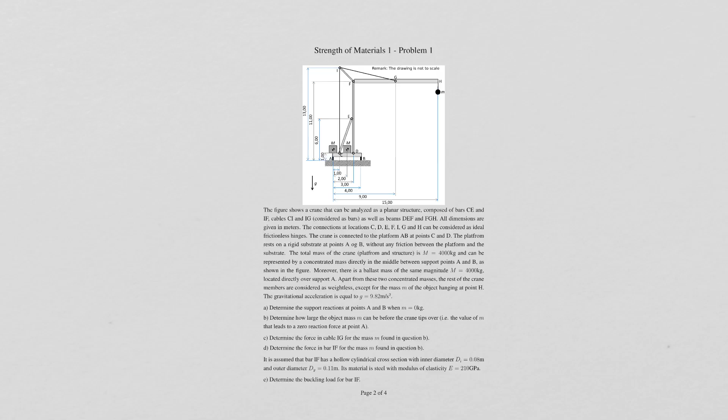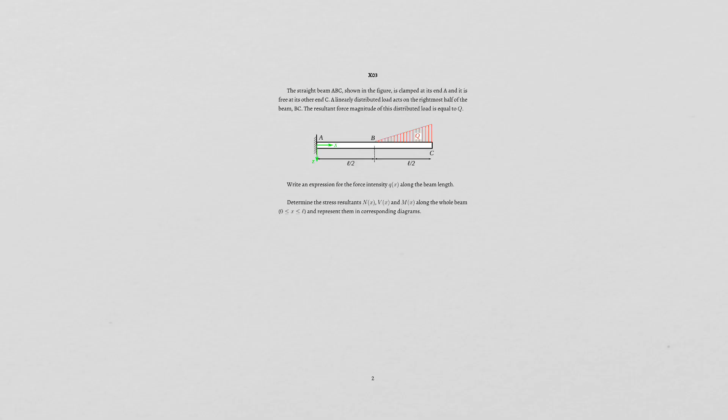So the first one is a pure statics exercise. There are 5 questions in this one, so we will go through all of them. The second problem is about a distributed load and about drawing stress resultants. And the final problem is about composites. So that covers pretty well a lot of the syllabus that we have been going through in the course.

In the first question, we are asked to determine the support reactions at point A and B when the mass small m is equal to 0. So we see here a drawing of the problem. Small m in the first part is equal to 0, but we have 2 other loads: we have capital M here and we have capital M here. So we have 2 external loads on the system, and we're asked to determine the support reactions at the 2 points of the support, here and here.

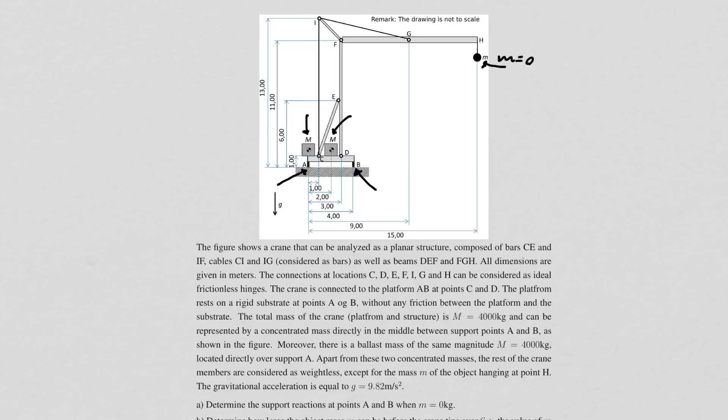So of course, when we're asked about support reactions in a statics exercise, we need to do a free body diagram of the complete structure. So let's move to it. Support reactions in A and B—we will draw a free body diagram.

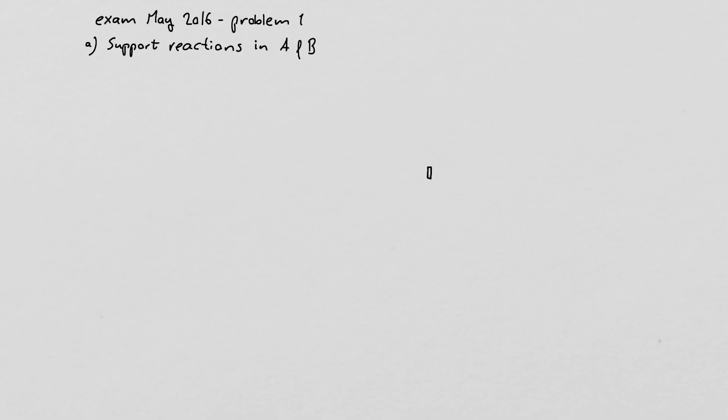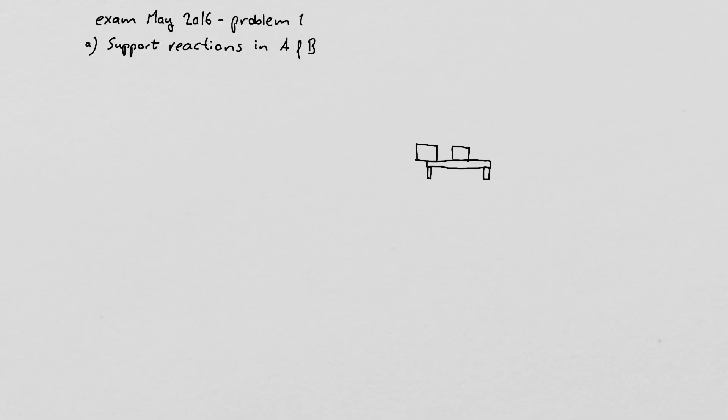So we have one external mass here, another external mass in the middle here, and then we have some structure, of course. I'm just going to be slightly sloppy in drawing this one. Why am I going to allow myself to be slightly sloppy with the rest of the structure? Because when we're drawing a free body diagram of the entire structure, we need only external loads. So what do we have of external loads? Of course, we have the support reactions in A and B, which we are asked to compute.

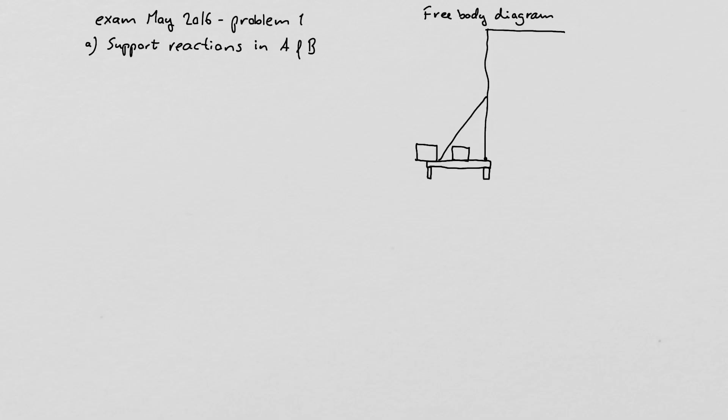We are told also in the exercise that we have no friction, so we only have vertical support reactions at the 2 points where the whole crane is—I'm going to call them AY and BY. Then we of course have the external loads coming from the 2 big masses loaded on the crane, so we have MG and MG, and that's it. Since our small m is equal to 0, we don't have any external loads from this small mass. Also, all other forces in this complicated crane structure will be internal forces, right? So they should not be drawn on a free body diagram of the complete structure.

So it's really a good idea to be careful about drawing these forces so that we can see where they act and in which direction. I think this drawing where the forces are placed is almost on the limit of being a little too sloppy. So please make sure the drawing is very clear so everybody can see where the forces are located, and make sure you do not draw any internal forces in the free body diagram of the complete structure. Okay, so now we have the free body diagram.

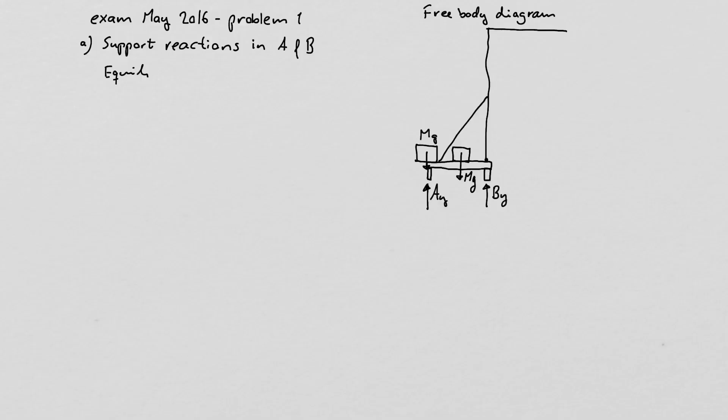We can start doing equilibrium equations. As usual, when we have 2D statics, we have 3 equilibrium equations at our disposal. We can start with force equilibrium, we can do moment equilibrium, one or more moment equilibria, and we can combine these equations the way we want. Of course it's smart to choose equations that will make your calculations as easy as possible.

So here I will choose to do a moment equilibrium around point A. I indicate this with a round arrow here showing that we compute our moment in the positive direction, anti-clockwise. I just put the A in here so we can see that we do a moment equilibrium around A. It's not called momentum, and it's not momentum in one point or something like that - I still see that formulation being used. It's moment equilibrium around a point.

So how do we compute the moments? We have to identify which of the external forces gives a moment around this point. We have By, and we can see By gives rise to a positive moment around A, anti-clockwise. So we have the force and we need the moment arm. Looking at the drawing, we can see that the moment arm, the distance between the A and B point, is 4 meters.

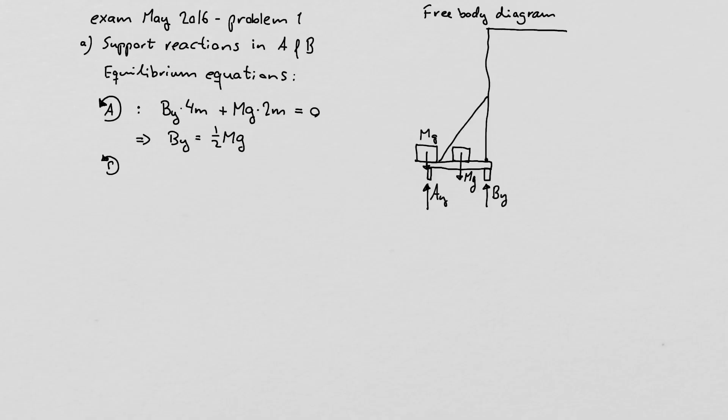We could also take the moment around point B. If we do that, we can see here that AY gives a negative moment. And then we have both external forces, both big masses, providing a moment around point B - they're both in the positive direction.

First we take the one farthest away from point B, which also has a moment arm of 4 meters. And we have the other one with a moment arm of 2 meters. It's a moment equilibrium, so the sum of moments has to be equal to 0. Again we can solve this equation for AY, and in this way we find that AY equals 3 divided by 2 times capital M times G.

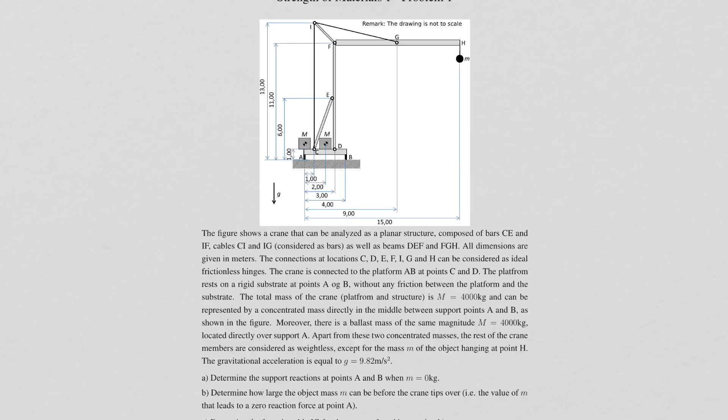Now for problem B, we are asked to determine how large the object mass small m can be before the crane tips. We're actually given a help to this, because it is indicated that the mass corresponds to the point where we get the 0 reaction force in A. So we have to do another free body diagram and more equilibrium conditions. Let's take a look at it.

Now we have the second free body diagram here, but we have to modify it. I've copied it from exercise part A, but we have to modify this free body diagram to fit the new conditions. So we're now asked for the value of small m.

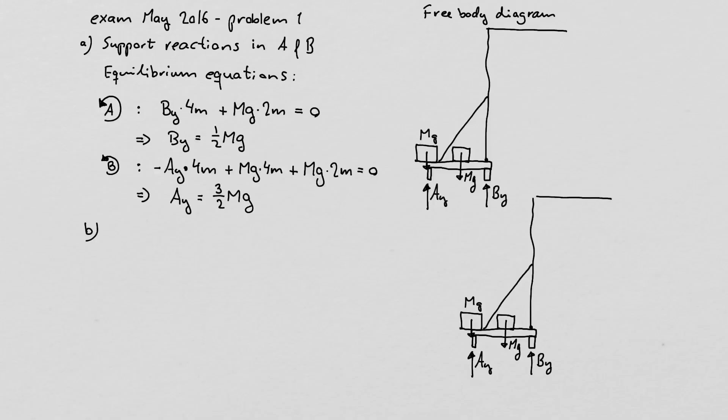So we now have another external force coming from the small mass, mg. But we're also told that the point where the crane tips is exactly the point where we don't have any normal force in A - that's where the wheel starts to come off the ground. Then we don't have any support reactions in A.

Before we set up the equilibrium equations for this problem, there's one very important note: do not be tempted to use the same value for By as we computed in A, because we have a new system now. We have other forces, we have the small mass added, AY is gone. So the By that we compute in B will not be the same as the By that we computed in A.

That's a very important notice. Of course, if we choose our equilibrium equation as the moment equilibrium around point B, we will not use By anyway. But you might have chosen other equilibrium equations where you have used By, so there the note should be taken. So, moment equilibrium around point B - now we have the small mass.

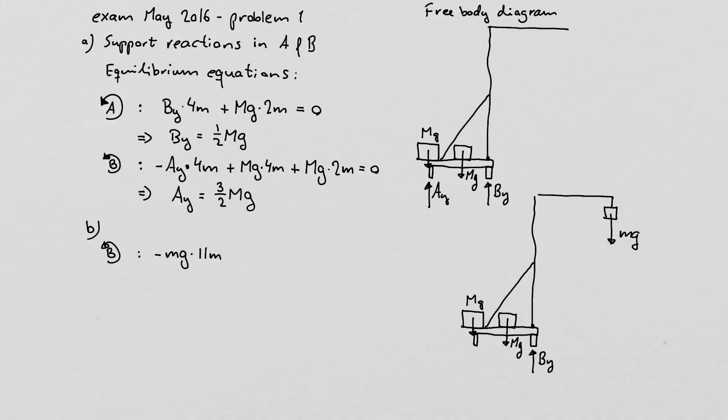If you look at the drawing, the moment arm to the small mass is 11 meters. And then we have the two big masses again providing a moment, one with moment arm 4 meters, and the other one with a moment arm 2 meters.

Solve this equation for small m, which we're asked for. We get that small m in this case becomes 6 divided by 11 capital M.

Now in problem C, we're asked to compute the force in the cable from I to G in the specific case where the mass is exactly what we computed in question B.

So now it's important to realize that the force in the cable IG is an internal force. So we can no longer restrict ourselves to looking at the complete structure. We either have to split up the structure in parts or we have to make cuts.

And splitting up the system in parts here, there's no cookbook of how to choose the system that we now look at. So you have to think about where it would make sense.

Of course we need to look at a part of the structure that's located where we have the force IG, we need that. So one obvious choice could be to look at the part of the structure composed of the beam from F to G to H. So this part, we take this part of the structure out of the complete structure.

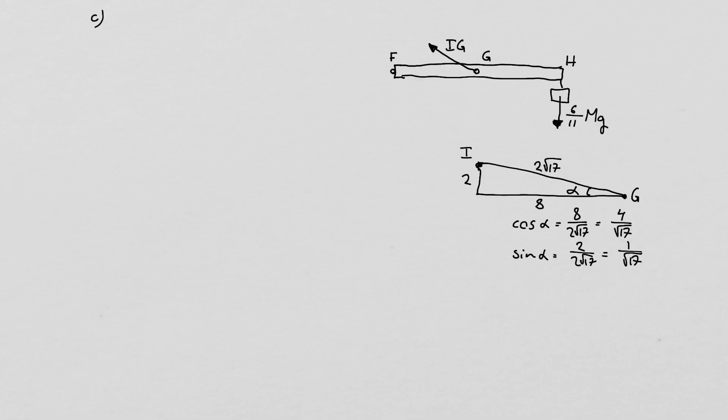And when we look at the picture of the structure, we can see there is a rod going from I to F. So in a rod, of course, we also know that we have a force in the direction of the rod.

Which we call IF. And then we also have this part of the structure connected to the vertical beam going from D over E to F. And it's connected also in the pin, so of course we can get two perpendicular forces coming from the lower beam. So we can call those Fy and Fx.

Now, the first thought here when you have drawn this free body diagram of the part is that that was not maybe a good idea. You have too many unknowns, right? How many unknowns do we have? Well, we have 4: Fx, Fy, IF, and then we have IG, which we want to determine.

But it's not necessarily a problem to have too many unknowns if we can get rid of many of them by a cleverly chosen, for instance, moment equilibrium. Then we can actually compute some of the forces, though we cannot compute all of them since we have 4 unknowns and only 3 equations.

But as we can see, if we choose to take moment equilibrium around point F, well then 3 of the unknowns, IF, Fx, and Fy, do not enter into this moment equilibrium equation, and we can use this to determine IG directly.

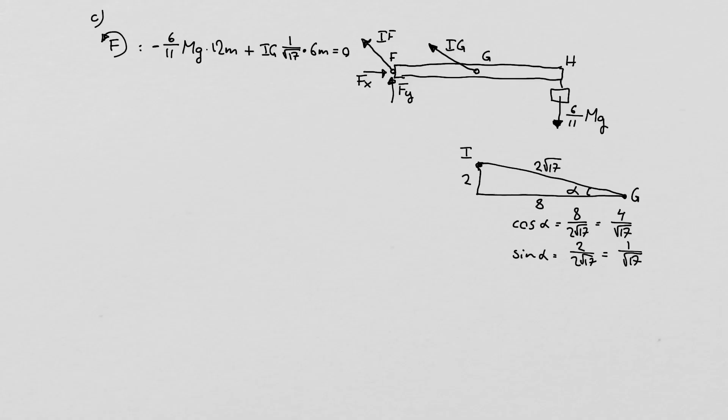And we get that, if we collect all the terms here, the force Ig becomes 12 multiplied by square root of 17, divided by 11, multiplied by capital M and by g.

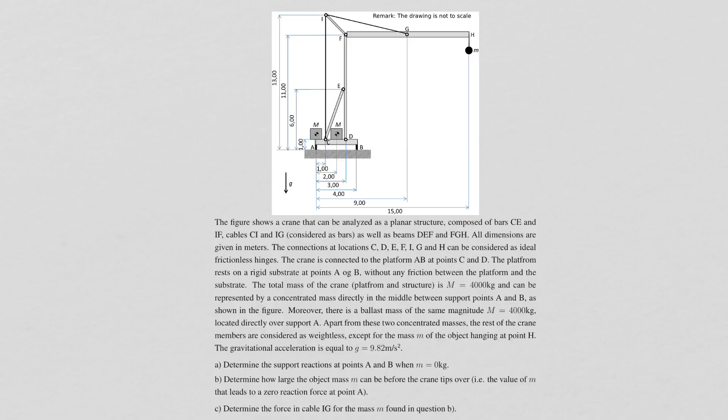Now if we go to problem D, we can see that the next thing to compute is the force in the bar IF for the mass found in question B. We're looking again at the top part of the structure. But as we saw from the previous calculations for system FGH in problem C, we had 4 unknowns, so it's unlikely we can find force IF from the same system.

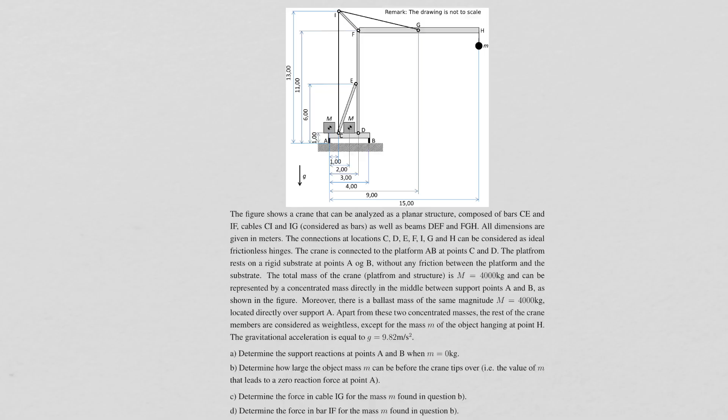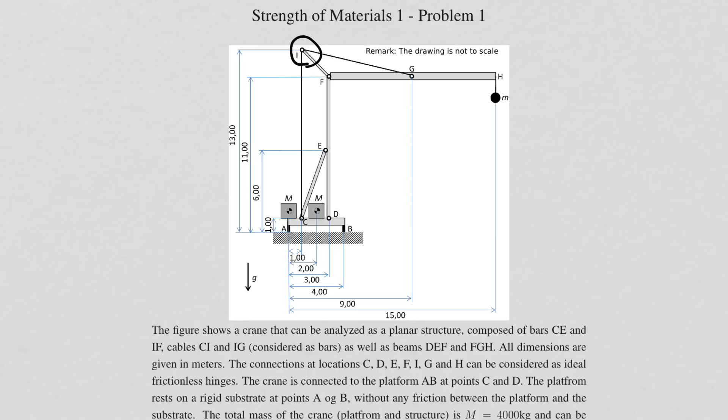So instead we will look at the point. Remember when we did the truss exercises, we could use the method of joints, which is actually a point equilibrium. Even though this is not a truss structure, if we have a point or joint, we can still make the equilibrium of a point here. Looking at point I is going to give us enough information to find the force IF.

Let's look at it. Let's draw up our point I here. We have 3 forces acting on that point: the vertical force IC, the IG that we just computed, and then IF, which is the one we wish to find. When we look at equilibrium for a point, we only have 2 equilibrium conditions.

So what we'll choose here: if we look at horizontal force equilibrium, then we can see that IC does not contribute, and we have only one unknown, which is the IF we wish to compute. So let's see, we have IG. Now we need the horizontal force component from Ig, and we already computed cosine alpha, so we'll have 4 divided by square root of 17 as the horizontal component of Ig.

If we look at the drawing from IF, we can see that the bar IF is at a 45-degree angle. That means the components are particularly easy: square root of 2 divided by 2. That's one of the quantities that are good to remember, the components for a 45-degree angle, square root of 2 divided by 2. The sum of these 2 forces must equal 0, and we can use that to compute IF.

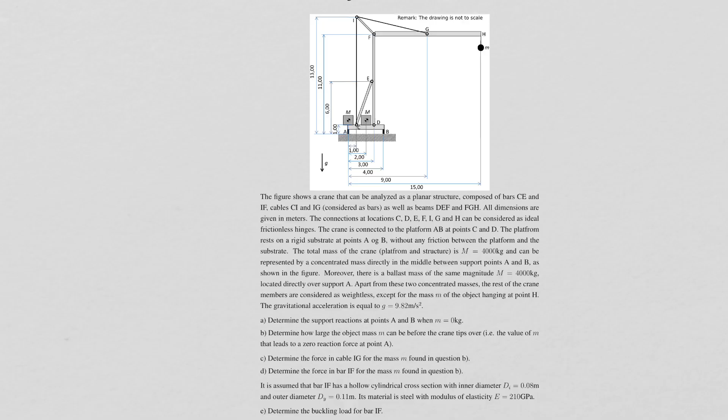It is not a difficult exercise because we only have a limited number of buckling cases depending on the boundary conditions. If we look at bar IF, it has a simple hinge in both ends, so we can directly identify it.

So we will have buckling case 2 by identifying the boundary conditions and then just simply inserting from the formula.

We know that for case 2, the buckling load will be pi squared multiplied by EI divided by L squared. So after computing the moment of inertia for the corresponding cross-section and computing the length of that rod, we can simply insert P critical. It's very simple in that respect.

In the next exercise, X03, we have a cantilever beam, which means it's fixed clamped in point A, and then it's free in point C. We have a distributed load starting at point B, linearly increasing up until point C, with the total force of that distributed load being capital Q, pointing upwards, as we see from the small arrows.

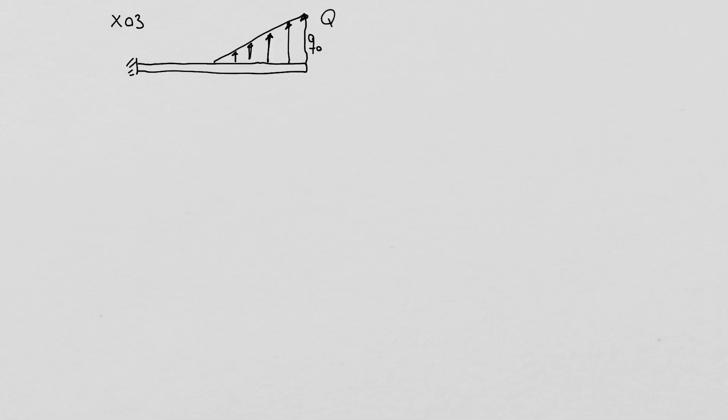That's usually how we specify things, and a good help in order to specify the intensity distribution is to have the value of small q at the end. We usually call this Q0, right? And we know that capital Q is the total force. So how do we first relate small Q0 to capital Q?

We know that the total force is equal to 1/2 the intensity at the end multiplied by the length. Here we should be careful because the distributed load is only acting on half of the length of the total beam, so the corresponding length is L/2.

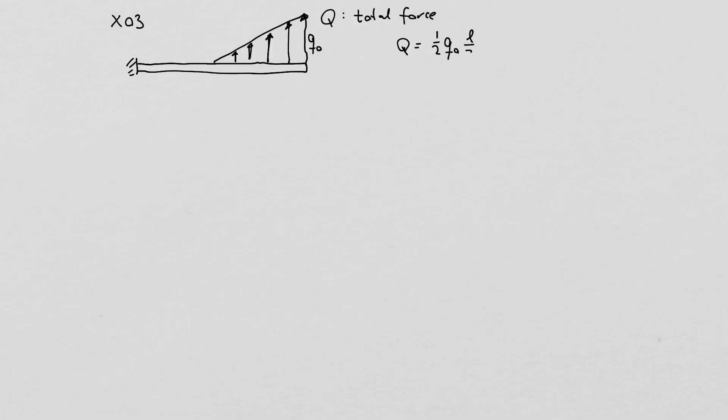And then our Q0 is, well, we want that to be negative, right? We always specify the direction of the small q's as being downwards, so we will have a minus sign here. So Q0 we can find as 4Q divided by L.

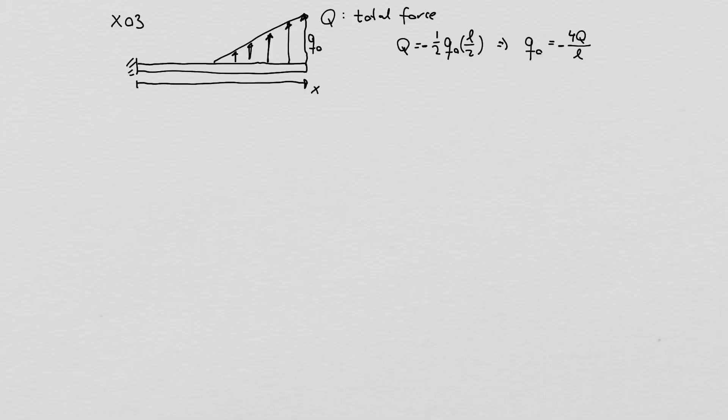Now we can move on to specifying the distribution of the load along the length, with our x coordinate going from here. When we specify the intensity along the length, for the first part of the beam we have no intensity, so going from 0 to L/2, we have 0 intensity.

Then we have to specify the expression for Q of X so that it matches the expression we have for the total force and the force intensity at the end of the beam. We know it's a linear distribution and it should be 0 when we are at x equal to L/2.

There are many ways of constructing this. A little bit of trial and error is maybe the easiest approach, because we know it's a linear function that should be 0 when x is equal to L divided by 2. We could start by making a parenthesis that we know is equal to 0 when x equals L/2, and we know that when x is equal to L, this value should equal Q0.

Specifying 2Q0 here means that when x is equal to L, then we get Q0, and that is valid for x going between L half and L. Of course, we can then insert capital Q, which we should.

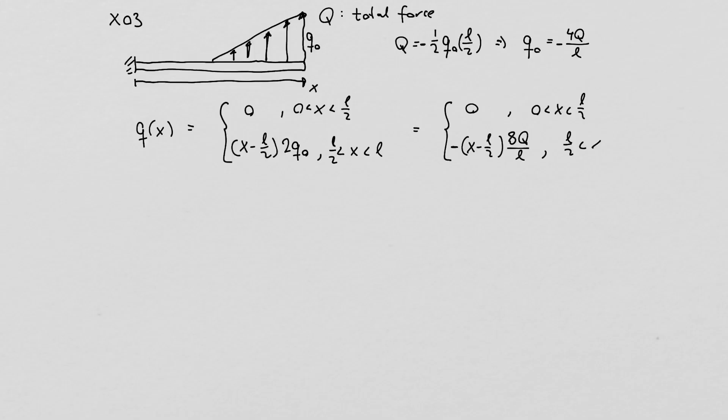Now, in the second part of the exercise, we're asked to determine the stress resultants: N of x, the normal force; V of x, the shear force or transverse force; and M of x, the moment along the whole beam, and also to draw the corresponding diagrams.

So here we have two parts in this beam, right? We have the part from A to B, where we have no distributed load, and we have the part from B to C, where we have a distributed load. So we need to handle those two parts individually or separately.

Now looking at the first cut, we make that to the left of point B. So we are now restricted to look at the first part of the beam. We make a corresponding cut, what we call cut 1, at a point X, which is of course arbitrary, but it's located in between point A and point B somewhere.

Now, in order to represent the distributed load, we have here indicated the corresponding force. We know it's Q, capital Q, we've already been told that, but the location, the equivalent force center for this distributed load, we have already computed that several times, and we know it's at the 2/3 point, or 1/3, depending from which side you look at it. And for this particular distribution, we can identify the distance between the equivalent force and the endpoint as being L divided by 6.

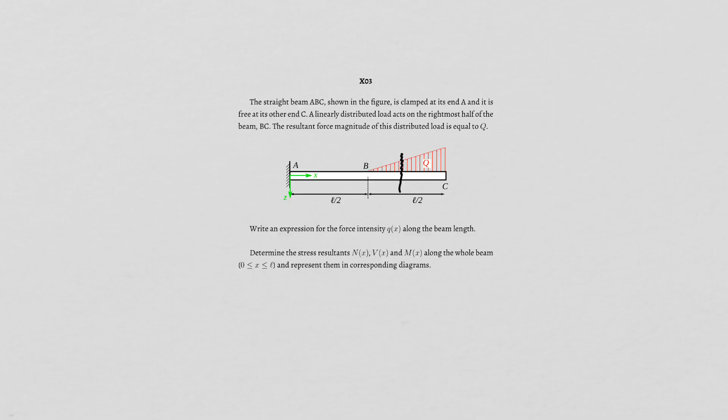Now for the second part of the structure, we have to be a little bit careful. We could do the same as we did before, but when we make the cut somewhere along the second part of the beam from B to C, we also have to find the equivalent force center for the remaining part of the distributed load. We could do that, and it's also possible, but always remember there's another way of finding the stress resultants when we have a distributed load, and that's by integrating the load distribution.

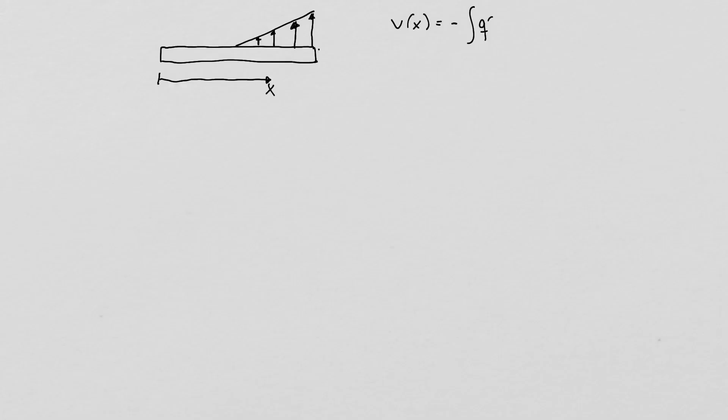So let's try that. I'm not saying it's easier here, but it's doable, and it's not more difficult than finding the equivalent force center. So let's remind yourself of the expressions for V of x and M of x: it's minus Q, and then we have a constant, C1. And then when we find the moment, it is the integral of V of x plus C2. And then we find the two constants C1 and C2 by applying the boundary conditions. So these are completely general formulas. They could also be used if Q is 0.

So we could also have used that method for the first part, from A to B, but there it was definitely easier to use the direct statics approach. In this case, however, it might be easier to use this approach. So we need to insert our distributed load.

So our V of X becomes: we insert the value that we just computed for Q of X, and with a minus, so the minus goes out the first minus, and then we had a constant, which was 8 capital Q divided by...

So we found our distributed load here. I just realized I made a small mistake because I was missing a part divided by L here, which then translates into L squared here. So that's in order to make this work. When you insert X equal to L, we need to divide by L in order to get the Q0. Small mistake, but let's insert this value here.

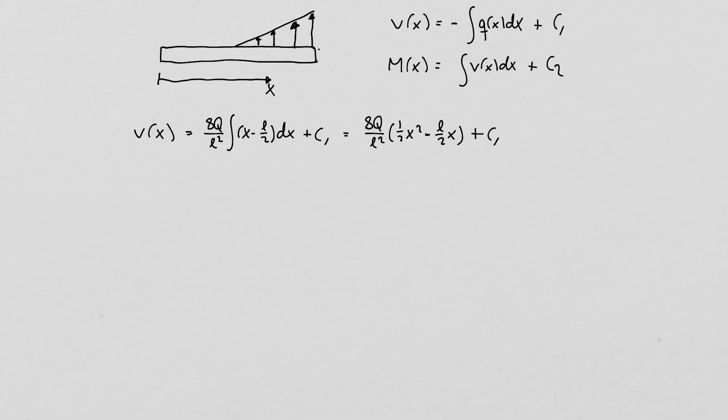So let's see if we can find our constant C1 from the boundary conditions. Well, what do we know? At X equal to 0, this whole exercise is only valid from X equal to L half, right? That's where we have the distributed load. But fortunately, we have the boundary conditions for X equal to L because we have a free end.

Even though we have a distributed load going all the way to L, that doesn't mean the shear force is not 0 at the free end. It is only if we have a concentrated load at the free end that it's not equal to 0. So that's important. You might be confused by the fact that we have a distributed load there, but we still have a free end. So our shear force at x equal to L is equal to 0.

So by inserting, we get 8Q over L squared times 1/2 L squared minus 1/2 L squared plus C1. The first part is 0 anyway, so for this to be true we need the C1 constant to be equal to 0.

So we can write up our distribution of shear force. We can simplify the expression a little bit: draw out 1/2 from the parenthesis, so we get 4Q divided by L squared, and then we can have an X here, giving X minus L. So now we can go on to the second part, which is finding the moment distribution.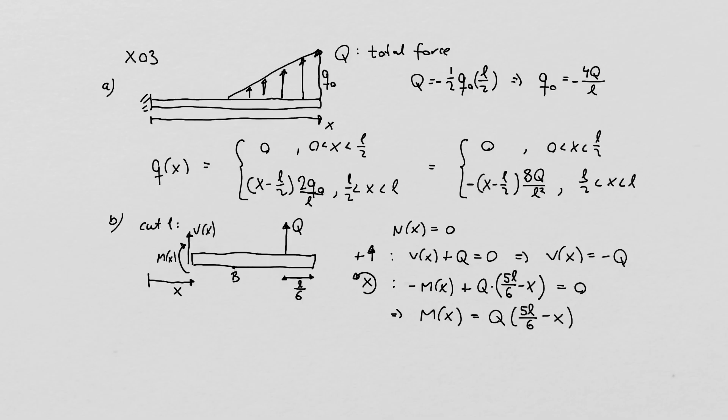Now, if we look at the answer from the first part, from x going from A to B, we saw that our V was equal to minus q, and our M of x is a linear decreasing function starting with the value 5L divided by 6 times q, and then decreasing linearly until we reach L divided by 2. So we can draw this.

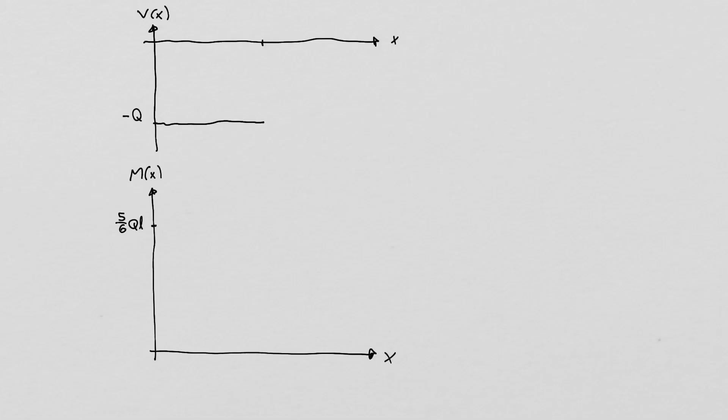The first part here. And then we said we had 5/6 q of L, and then we have a linearly decreasing function.

We don't have any concentrated loads in this case, so we have no concentrated moments either. That means we do not expect any discontinuities in terms of either the shear force or the moment.

We could of course check that in the expressions. Indeed, in the expressions we derived just here, we could see that the shear force at x equal to L divided by 2, if we insert that, matches exactly minus q.

What we can see here is that if we look at the shear force, it's a quadratic function in x. If we draw that, we know it has to end at 0 for x equal to L, and the quadratic function will, in this case, look like this, going to 0 at x equal to L.

For our moment, again we expect the value here at the end, if for x equal to L divided by 2 it matches what we had from the other case, so that we have a continuous curve.

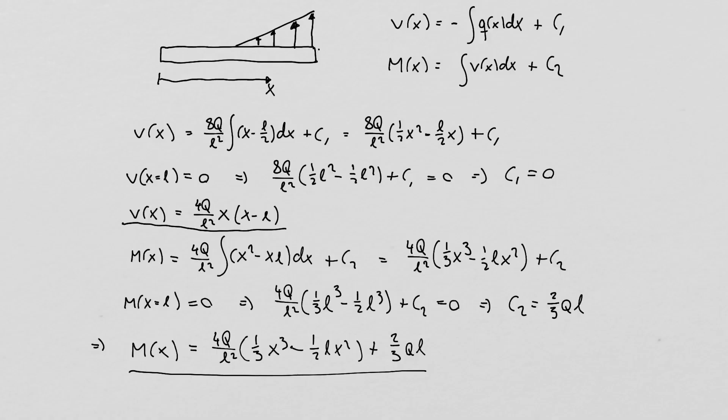Then we see here that we have a cubic function, and inserting specifically the cubic function here, we will find that it follows a curve sort of like this. It's not easy to see that it's a cubic function, but it is. Of course, with the aid of some mathematical software, this is easier to make a nice drawing here.

The final exercise is a composite beam. So we're given like an I profile, and it's maybe a little bit more complex when you look at it than some of the other composite beams. So that means we look at the cross section here.

But we are given the percentage of the fiber reinforcement in the two parts, so we can use the formulas for fiber reinforcement that we have, the rule of mixtures, in order to compute E1 and E2 for the corresponding parts of the cross section.

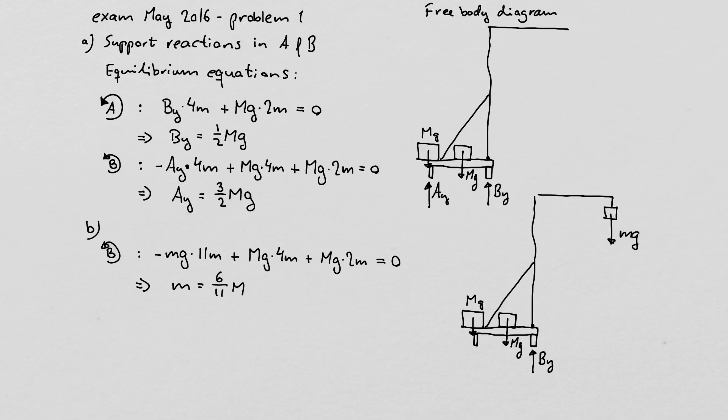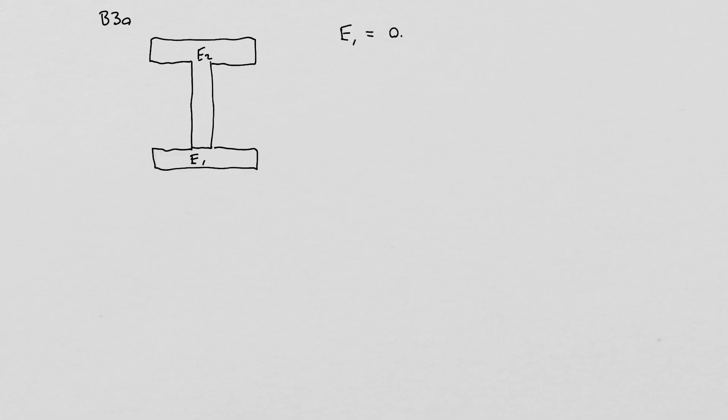Using the rule of mixtures, we are told that in the stiff part we have 50% of matrix material, 50% of fiber reinforcement. That means the corresponding Young's modulus is simply 0.5 times E fiber plus 0.5 times E matrix. With the given numbers, that corresponds to 18 times E matrix.

In the softer part, we know we have only 20% of fiber material. That means the corresponding numbers will look like this: 7.8.

So what it tells us is that we have a stiffer material, which is a bit like 2.5 times stiffer than the softer material in this part.

So you can say that this is an extra small exercise before we get started to actually find E1 and E2 from this fiber reinforcement specification.

Now the first exercise we need to do is more traditional in terms of composite beams. We are asked to find the neutral axis, and that's of course because we can see that it's not a symmetrical cross-section with respect to the distribution of stiffness. So we do not in advance know where the neutral axis is.

So once we have found the beam neutral axis, we can then use it to find the bending stiffness, which is this H3 star, the main quantity when we're talking about computing composites. It's finding H3 star, which is the equivalent bending stiffness for composites.

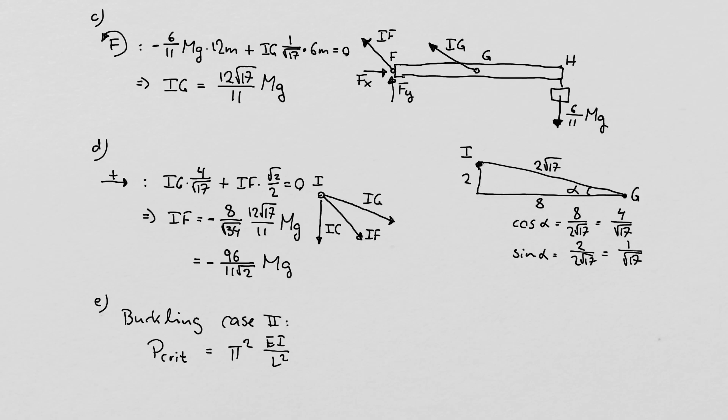So doing that, there is a very strict cookbook in order to be able to find that. The first part is actually, sometimes you overlook the importance of it. It's critical that you understand that when we compute the neutral axis, the position of the neutral axis, we can put in a coordinate system in any way we like.

So, of course, the computations that will be involved are very dependent on where you put this coordinate system, but the result is, of course, independent of that.

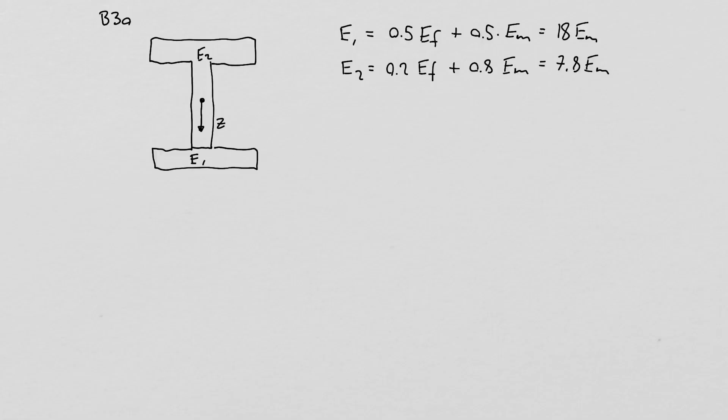So in this exercise, we simply choose to perform all of our computations based on a coordinate system with the origin in the neutral, in the center point, in the symmetry point here. And we could have chosen another coordinate system.

Once we have determined or specified this coordinate system, we simply compute the necessary quantities. First computing h1, and h1 is given as e1.

Well, the computation, that's an integral, but it becomes simple specifically when you have a constant Young's modulus in the various parts. Here we have a constant Young's modulus, so we don't need to do the integration. It just becomes the Young's modulus multiplied by the corresponding area. The area where Young's modulus equals E1, looking at the geometry, is 3a squared, the area of the bottom part. Then we add the part with Young's modulus E2, whose area is 5a squared. If E had been a varying function of z, we would have needed integration, but here we can compute easily and get 93 E m a squared. This is the first part.

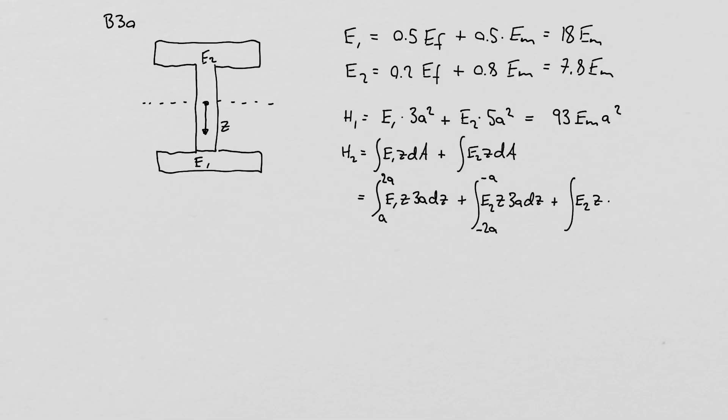Still E2, still z, but the width of the middle part is only a, dz. That integral goes then, of course, from minus a to a. Doing this whole computation, we get 45.9 E m a cubed. There's also a small misprint—it's not a minus as it is in the solution.

Centroid or neutral axis is determined just from these two numbers, H1 and H2. We get z c equal to H2 divided by H1, and the answer is 0.4935a. So, due to the stiffer lower part, E1, our beam's neutral axis or elastic centroid is located further down than our choice of z coordinate. We cannot exactly see where, but it's maybe close to this line here, where we have the beam neutral axis. Well, so this is the first part—if we don't know the centroid, we need to compute it.

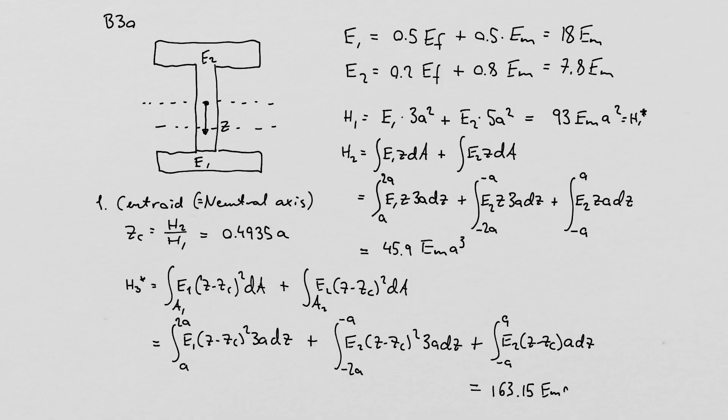So in exercise 2, we're asked to compute the deflections, first at point B and then at point C. So this is an exercise in using the elementary cases. And can we still use the elementary cases even though we have a composite?

Yes, if our bending stiffness is constant along the length. We have computed H3 star, the bending stiffness, and it's constant. We have the constant cross-section along the length of the beam, so we can still use the elementary cases. Of course, we then just have to replace our EI with our bending stiffness, which is H3 star.

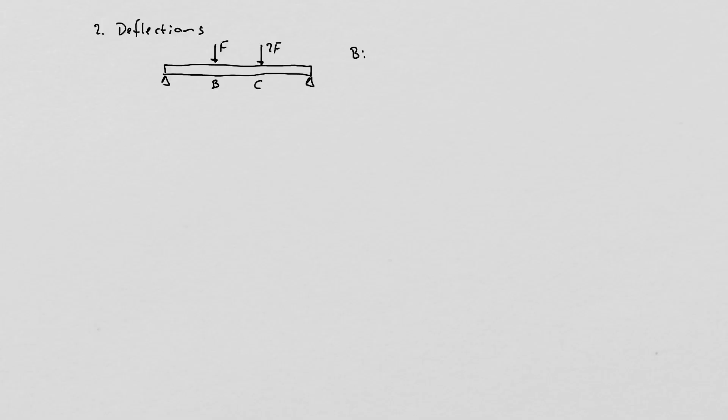So for the elementary case, we need, of course, to identify which elementary case it is. And in this case, we can see that it's elementary case 1, right? But we need to use it repeatedly because we have two forces.

So we can see here that our H3 star, and then our deflection, and then we compute it at point B. So this quantity is what we find in the fifth column, right? That's in the elementary case, that's written EI W of X, but our EI is now H3 star, and we are finding the W of point B.

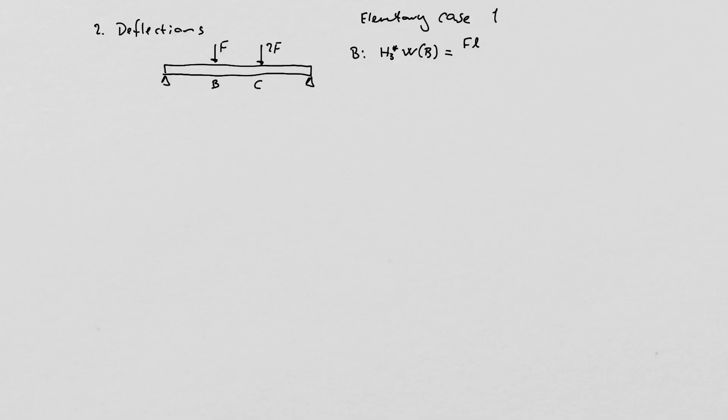So we just now need to identify the different contributions. So first we have the force F, our length - always be careful that you have the same length. In some cases, the lengths are given differently, like 2L for the entire beam, but here it's L, so it's easier. So it's L to the power of 3 divided by 6. And then we have all the contributions, beta, psi, and so on.

We have now both forces acting. Now we're looking first at the force F. It's acting at the 1/3 point. So we have both alpha, beta is now 2/3, and our psi is 1/3, right? So we have 2/3, we have 1/3.

And that means we have the parenthesis, which is 1 minus 4/9, which is 2/3 squared, and then we have minus 1/9, like this. And then we do not have the final contribution from this funny bracket, because that's only valid if our measurement point is at a point to the right of where the force is placed. So in all of these cases, be very careful that you understand how to compute these different psi, beta, and this curly parenthesis. In this case, it vanishes.

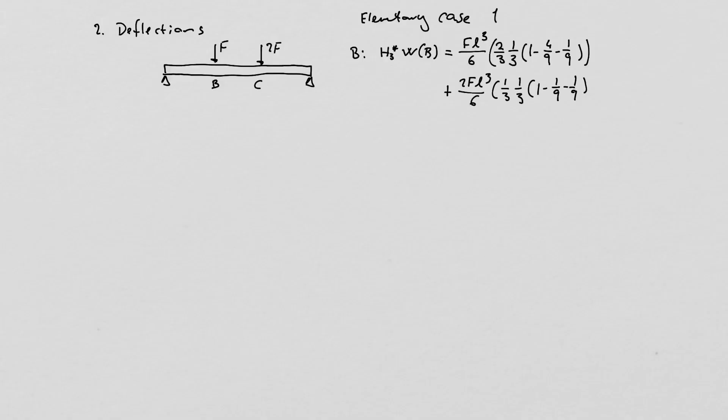We also need the contribution from the second force. So the only difference here is that our beta is now equal to 1/3. We're still computing at the 1/3 point. So the second part will be like this, and all of this gives then 11 divided by 243 F times L cubed, right? And then, of course, in order to find WB, we divide by H3 star.

Now let's see what is the deflection at point C. Well, of course, we have the same formulas, but we just, again, need to be very careful about identifying the correct factors or the correct constants to put into the formula. So now we start again with the F, and our beta is the same. Now our psi is now 2/3.

That means that we have 1 minus, and then we have 4/9 minus 4/9. And then in this case, the curly bracket is appearing because our psi is larger than our alpha. So we get plus, so our psi is 2/3.

Our alpha is 1/3, and that should be cubed. Be careful that you remember this term if you compute this kind of expression.

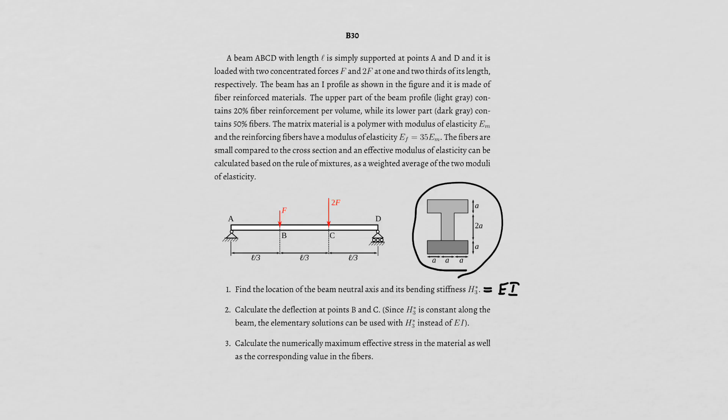One note about the two different values we are asked to compute: it's probably better to write average stress here, because that's what we mean. Remember, when you have a composite made of fiber and matrix material, you compute an average stress, but you can also identify the values in the fiber and in the matrix material. This is the fibers, which we are asked about in the second case here.

And why is that interesting? In principle, the average stress is not that important because it just smears out the stress value. Usually we have much higher values of stress in the fibers than the average stress, because the corresponding Young's modulus is higher. So this is probably the most interesting thing to compute, the stress in the fibers, because that's where we might have too high stresses that could correspond to failure in the material.

But here we are asked about both the average stress, seen as a composite, but also the value in the fibers. And we want to compute the maximum value. So that means we are both interested in computing where along the beam we have the maximum stress, but also if we have it at the top and which part of the cross section.

So remember, when you're asked about the maximum stress, it's both where along the beam, but also where in the cross section. Is it perhaps at the top part, or the bottom part, or in between? It's not in between, because we have the maximum strain either at the top or the bottom part, and therefore we usually also have the maximum stress at the top or the bottom part.

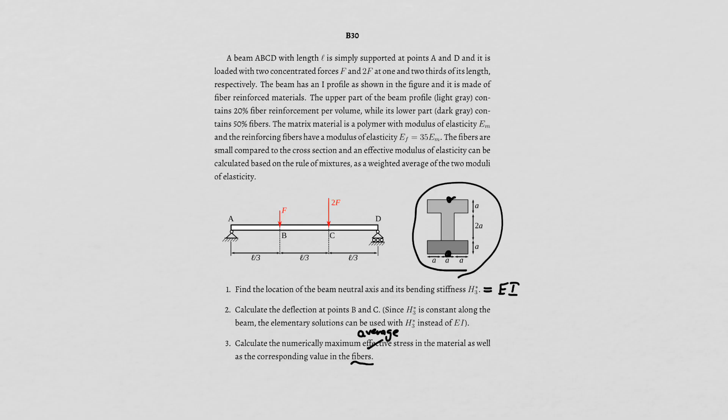So we have to compute and find where we have the maximum moment. This is also a bit tedious here, because we have three different parts of our cross-section, or our beam, where we need to do statics in order to find the moment distribution in three different parts. So we need to make three cuts.

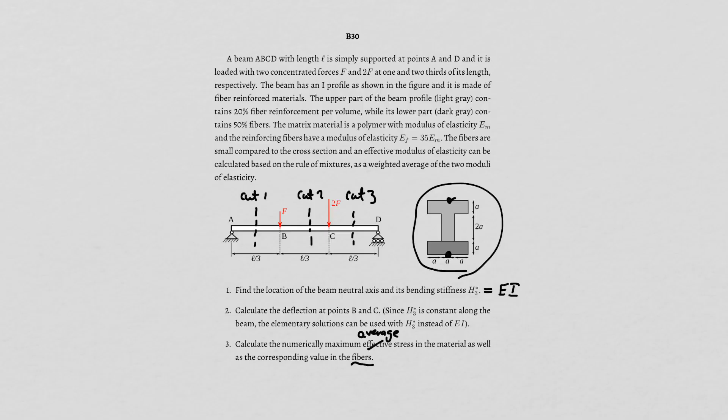And do statics in order to find the position of the maximum moment. So I'm going to jump a little bit ahead here doing that.

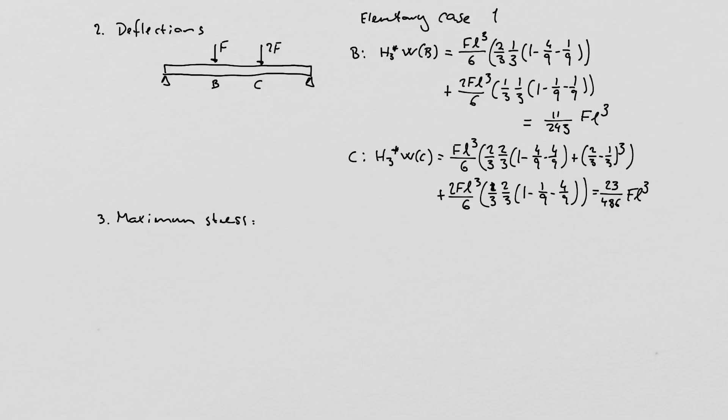So making these three cuts and doing statics: first we have to find the support reactions. We don't know them, but we have a statically determinate system, so it's not difficult to find the support reactions in A and D. Then we do statics at the three cuts: support reactions plus statics for three cuts.

Then we get the following moment distribution. So in the first part, second part, like this. So I jumped, and I have just stated the conclusion. This is the moment distribution that we find from doing that. We already did similar calculations here in the repetition, the other repetition exercise. There is no specific need to repeat that, although of course it's very important.

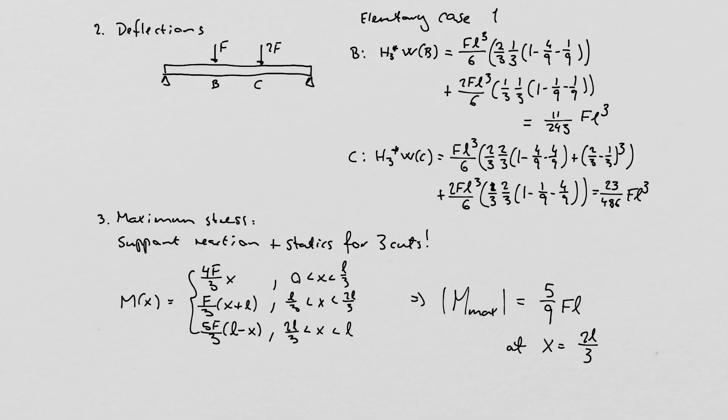Remember, we want the maximum stress. We need to locate the position of the maximum moment. Doing that, we can just look at the function, and we find that the maximum moment is 5 divided by 9 F times L, at x equal to 2L thirds. So at point C, we will have the maximum moment, and we know the quantity now.

Now we have the moment, and now we want to find the values of the stress. Let's first take a look at the strain, how the strain is actually distributed over the cross section.

So we have computed the neutral axis for the centroid, elastic centroid, and that's of course the point where we have zero strain. If we look, that's the line here that I indicated with the dotted line, that's the neutral axis for our cross section.

This is our cross section with the stiff area down here. So if we look at the strain distributed, we have zero strain here, and then we have a linear distribution of strain up here.

If we look in the notes for the composites, we can find that the strain is computed as our moment divided by our bending stiffness, which is of course in this case H3 star, and then multiplied by our distance from the neutral axis, so that we have zero strain at the neutral axis, and then we have a positive strain in some parts of the cross section, a negative strain in the other parts.

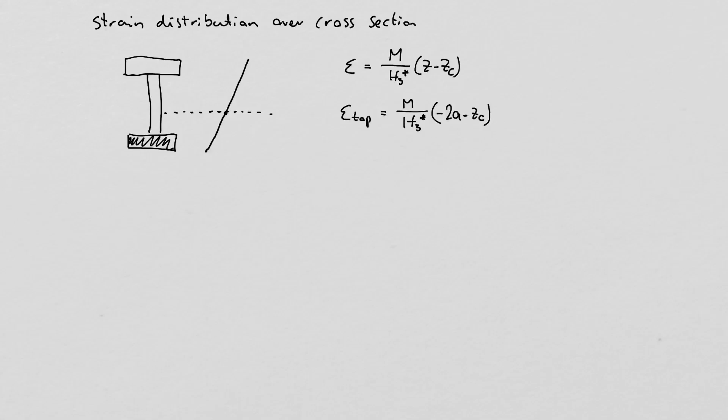And our z value. Remember, our z is still computed in the chosen coordinate system, right? So our z is minus 2a, so we find the strain in the top part, and we find the strain in the bottom part. So we have the value of the strain in the top part, we have the value of the strain in the bottom part. So why are these relevant?

Well, when we find the average stress, we find the value of average stress top, we of course find by multiplying our strain with our Young's modulus. And our Young's modulus in the top part is E2, because that's the average Young's modulus for the composite in the top.

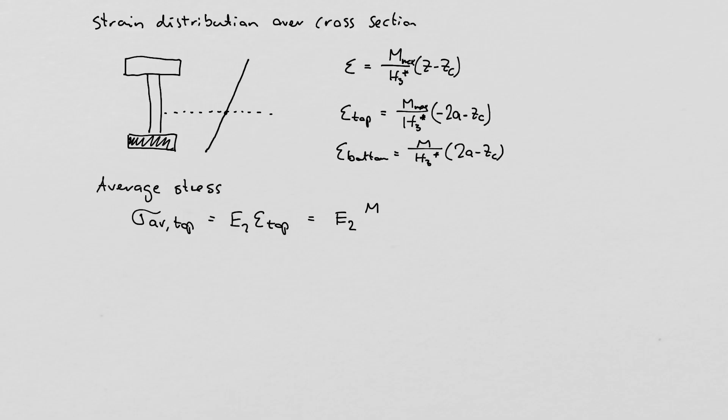E2 M, and this of course is the maximum moment, the max moment that we have computed. We are now at point C in the beam, looking at the cross section at point C.

And if we get the average at the bottom, then we have E1, epsilon bottom.

So what we can see here, actually, if we compute the values, is that even though our strain, the absolute value of our strain is larger at the top than it is at the bottom, because we are further away from our neutral axis, because we have the higher E1 at the bottom, we actually have that the average stress is numerically larger at the bottom than at the top.

Which is maybe a bit surprising. So we only can find this by actually finding both the value of the strain at the top and the bottom fiber, or a part of the cross section, and then multiplying by the corresponding Young's modulus at this part. So this is our average stress.